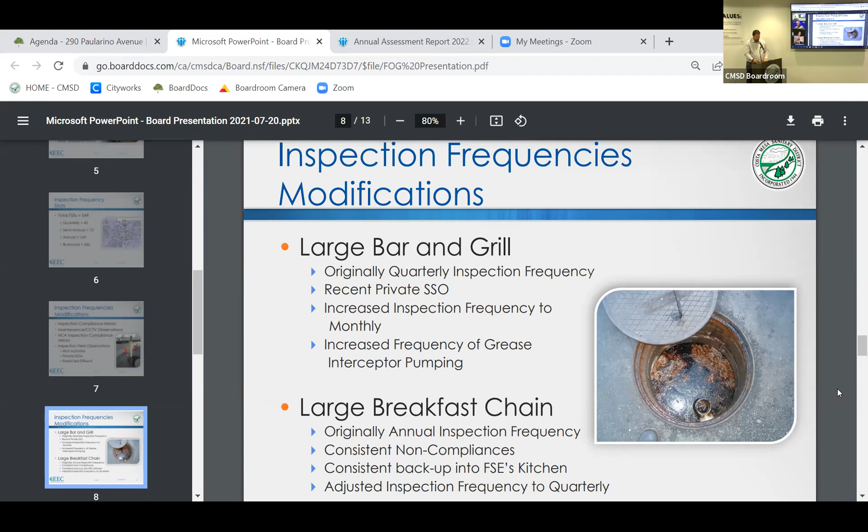We have another example - a large breakfast chain restaurant. They're originally on an annual inspection frequency. They don't have a grease interceptor, so that's why they were only being inspected annually. But they had consistent non-compliance issues, private SSOs, a lot of backups from their private sewer line into their kitchen area. So we decided to adjust their frequency to quarterly and made them do regular hydrojet line cleaning of their sewer system, and we confirm those records from their plumber that they're doing that.

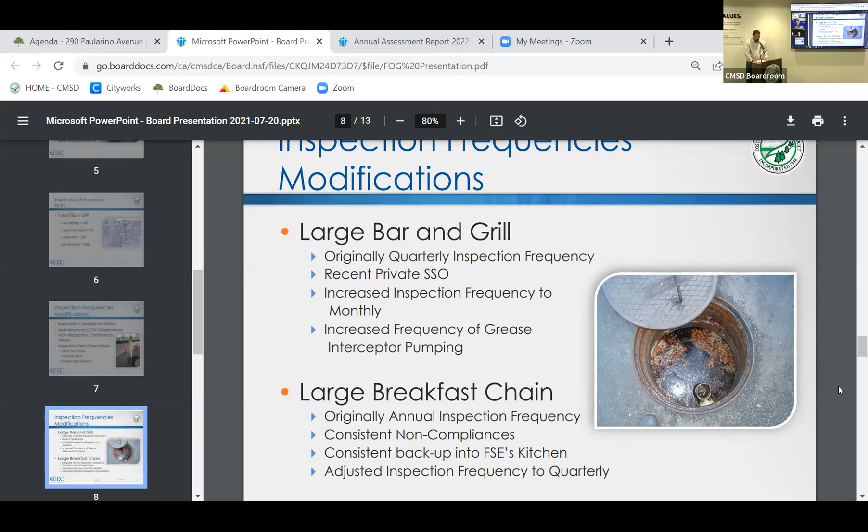So I mentioned we also assist with the review of enhanced maintenance locations, with the goal to reduce these locations. You don't want to have a lot of enhanced maintenance locations because that means you have a lot of areas that are prone to spills, but it's also taxing on the resources of the operations and maintenance crews that have to go out there and clean those locations.

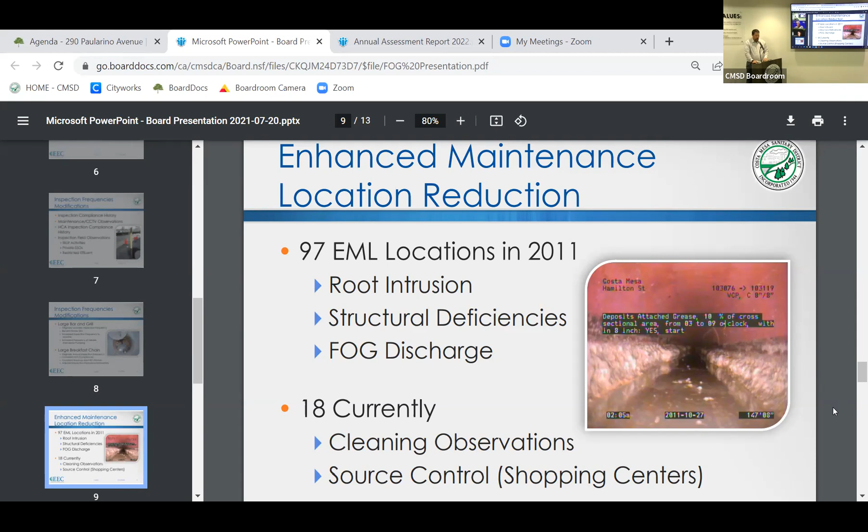So in 2011, there were 97 EMLs, and those have currently been reduced down to 18. This doesn't include the siphon locations. These are mainly ones that are EMLs because of roots, structural deficiencies, or fog. And so we're working to continue to keep these 18 locations under control through reviewing cleaning observations of the crews and then doing enhanced source control on the fog areas.

So on the next slide, I have a couple of examples of two locations that we're focusing on. So you have the area of the camp and the lab there on Bristol Street. This is just an area that has a lot of food service establishments that discharge into one location. It's at the top of the sewer line, so there's not a lot of water scouring velocity to push the fog down the line.

So it all builds up in these areas. And so we're working with the property owners there to control the fog, to ensure the facilities stay in compliance and keep up on their BMPs and their pumping frequencies. And we've increased inspections for this area.

19th Street, they have a lot of issues. It's an older area of Costa Mesa, and you have a lot of facilities there that were open prior to the implementation of the fog program. So at that time, we don't like to use the word grandfathered in, but they were essentially grandfathered into the program. They weren't required to install grease interceptors, and so they operate under what we call conditional variance. So there's just a lot of FSEs in there with no grease removal equipment. We've increased the number of inspections we do in this area to make sure they're keeping up on their BMPs. We've tried in the past to work with them to install devices, but it's very slow going.

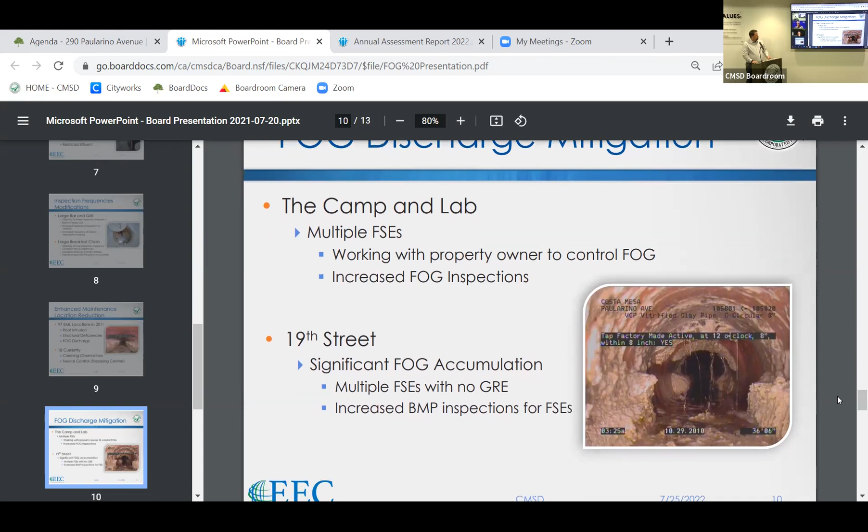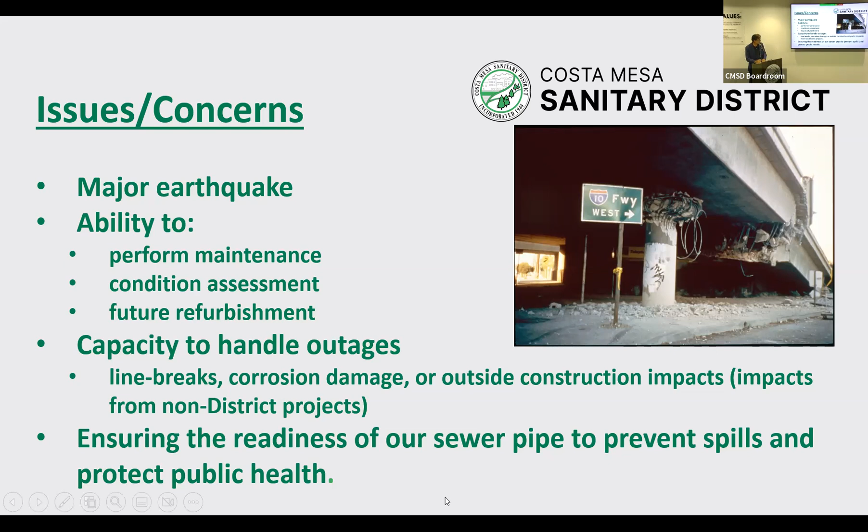So we want to be able to have that same capability. Quite frankly, the water board, regional boards, and health departments expect the same thing - they want agencies to have best practice.

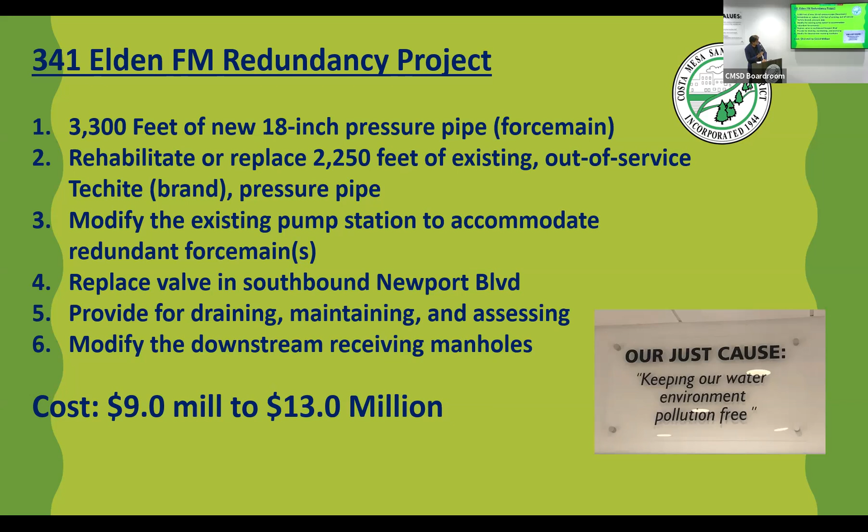We think it's going to take 3 to 5 years to get a project implemented. And what happens if tomorrow something happens? We have an emergency bypass pumping plan.

And I'll say that fortunately for me, I got to see a contractor implement our emergency bypass plan. What they did is they basically brought in, I think it was 17 pumping 5,000 gallon pumping trucks. They basically got as many trucks as they could muster in the Southern California area.

And then they still needed 8 more trucks. So they imported 8 trucks, and it took 2 days to get those 8 trucks down to Southern California, get them staged with the other 17 in order to start our project. So basically it takes 2 days to at least get everything here and get the trucks going.

So my thought is, if it takes that long, what are we going to do with the wastewater? I mean, we might be able to start pumping and reduce the flow, but are we going to be able to get it all?

I don't know. And then when we were actually pumping, I think they were getting more efficient as they practiced, and the trucks were learning to shuffle in and out at the different locations. But what we noticed is that during the low flow and the shoulder flow, they were able to keep up. But as the flow started to go up around 6 o'clock in the morning, we weren't maintaining flow anymore. The good thing is we were finished with the project.

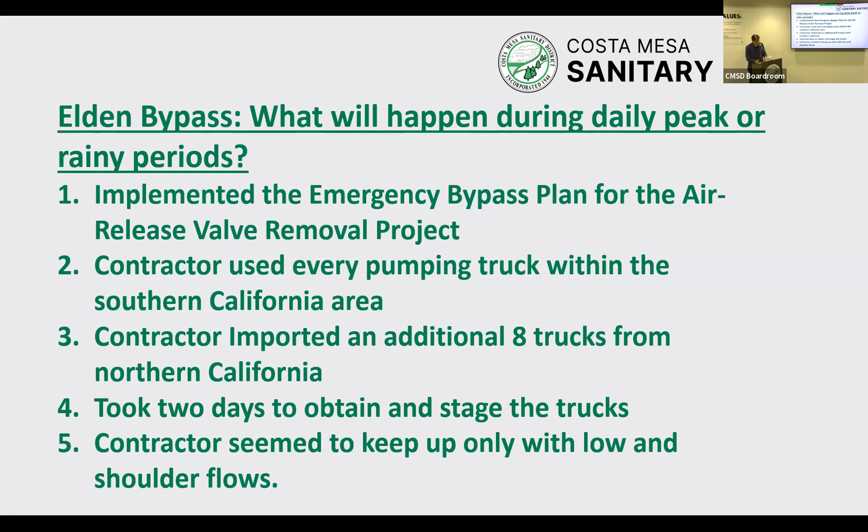So what we want to do is a 2-phased approach. The first one is we want to modify our pump station and be able to put some overland temporary piping. So we would make the connections. We might need to get some new headers and some new temporary piping. We would need to buy some lay flat hose, something that could be laid out, put together by staff or contractors, and then tie it into our existing pumping system and use that to get the flow past any break or issue with our first force main.

We could do that potentially in about a 6-month time period, and we could expedite that and order the equipment, because most of the equipment is probably the lay flat hose, and that would probably have a 4-month lead time. So if we could get that ordered, we could get it in within that 6 to 9 month period, or 3 to 9 month period.

Second part would be, let's implement the bigger part of the project, which is put a new buried pipeline in and do all this other work that we said we were going to do, and get that project completed.

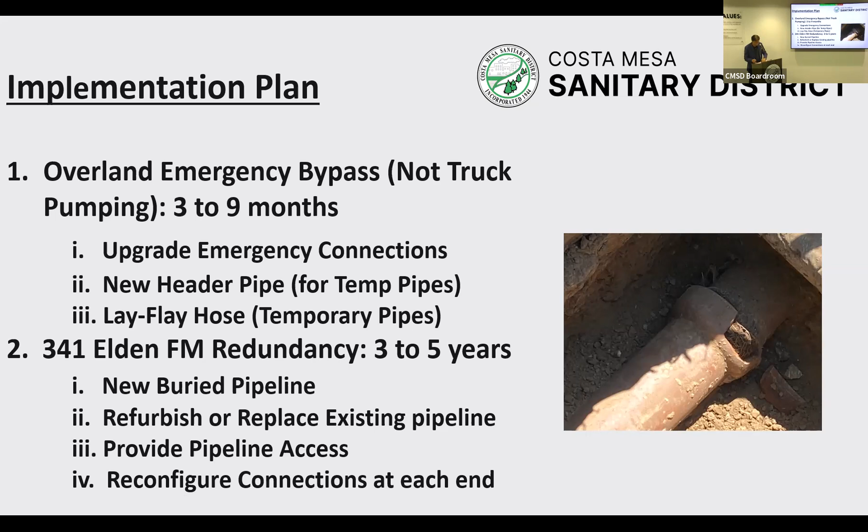Next slide. So what is a temporary system going to look like? This is a schematic of our existing pump station. Think about it as a bird's eye view looking down at the pump station. This box represents the primary pump station. This green line is the primary 18-inch force main coming out of the Elden pump station.

This blue line is the force main coming from the Irvine pump station. So from Irvine, the sewage comes up and dumps into the wet well for Elden. Elden pumps then take it and repump that, in addition to all the other gravity flow from the east side, into this pipeline and over to the west side and over to Fairview, where it goes to the Orange County Sanitation Districts. We do have a backup pump right here.

It pumps about 2,500 gallons a minute through an engine-driven pump that goes into our force main. So if this for some reason goes down or we have a power outage, this backup engine starts pumping flow until the primary station comes back alive.

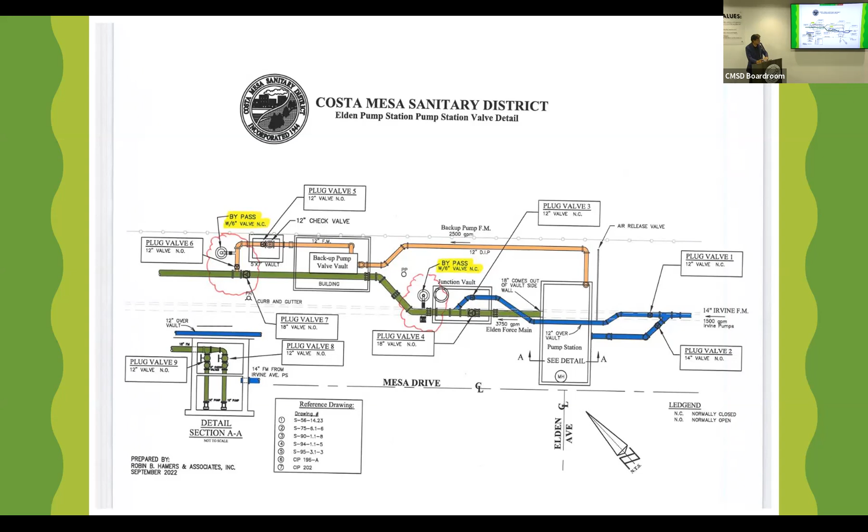So right now we have a way to hook a 6-inch pipe here and a 6-inch pipe there. So what we want to do is dig a hole, replace this 6-inch piping with two 12-inch pipes. We want to do the same thing right here, put a 12 by 12 cross in and add two temporary connections there. Then we could use those temporary connections to hook up some temporary hoses too.

Next slide. So what does all this look like? Ignore these pumps. What I'm trying to say is we would have to have a header with a couple of pipes coming out, and for our size, it would be two 12-inch pipelines. Next slide. That pipeline would be basically placed along the road.

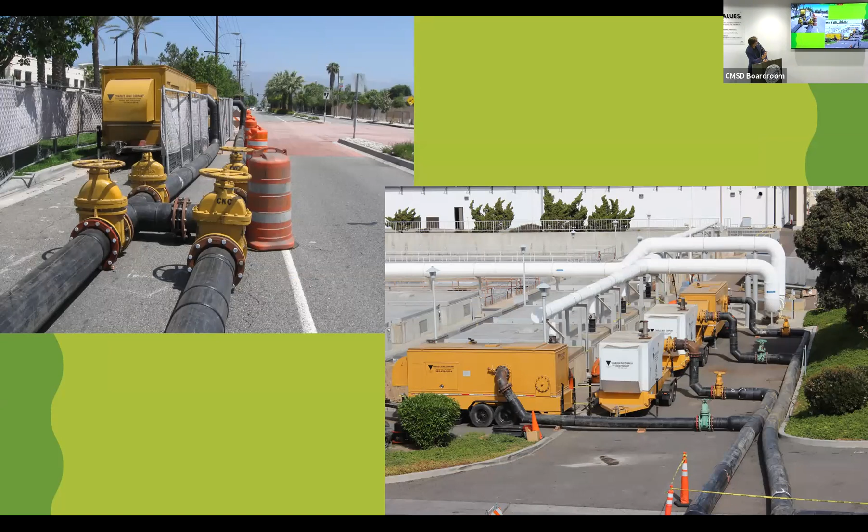It could be thought of as flexible pipe, but lay flat seemed to be easiest for us to store and maintain rather than having HDPE or long sticks of pipe. Where would we put basically 4,000 feet of pipeline? So anyway, where would we do this? The concept of laying it in the street and getting it from Elden over to the fairground entrance is what we would be trying to do.

This is just another example of pipelines and pumps that are used to bypass flow. Next slide, please.

This is a device, a trailer with a little motor on it. That motor spins this reel, and each of these has 4 slots that hold 660 feet of 12-inch lay flat hose. It's basically like fire hose, but 12 inches in diameter. The stuff gets pretty heavy, so you need about 6 people to deploy this device.

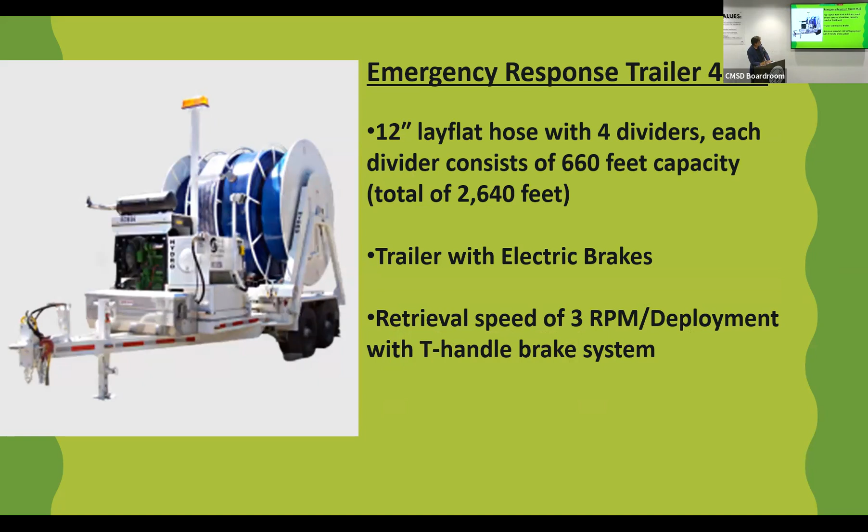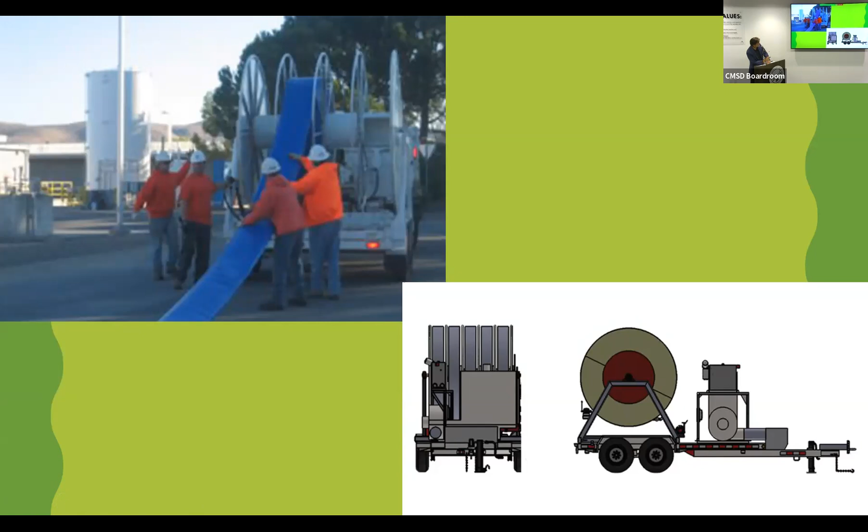Next slide. To give you a picture of how big it is, there's 4 people here. There's a driver, and there's probably the person who's helping organize taking the picture. But this thing's about 10 or 12 feet tall, and there's 4 of these little compartments with 12-inch lines. Next slide.

$750,000 of this is just the lay flat temporary hose. We think we need about another $250,000 worth of station modifications, and that's delivered. So that includes plans, specs, bidding, everything we need to get things going. So this $1 million is pretty firm. We're hoping to come in a little under that.

The Elden project, however, has a much larger range. Right now, based on what we know, we think it's going to be about $10,500,000. 7 million of it would be pipeline. We've got 1.2 million in delivery costs.

There's a lot of unknowns, specifically how much it's going to cost us to bore under the freeway. There's 2 60-inch storm drains in the freeway, digging deep holes on either side, taking a boring device and jacking and boring under the freeway. There's a lot of unknowns right now.